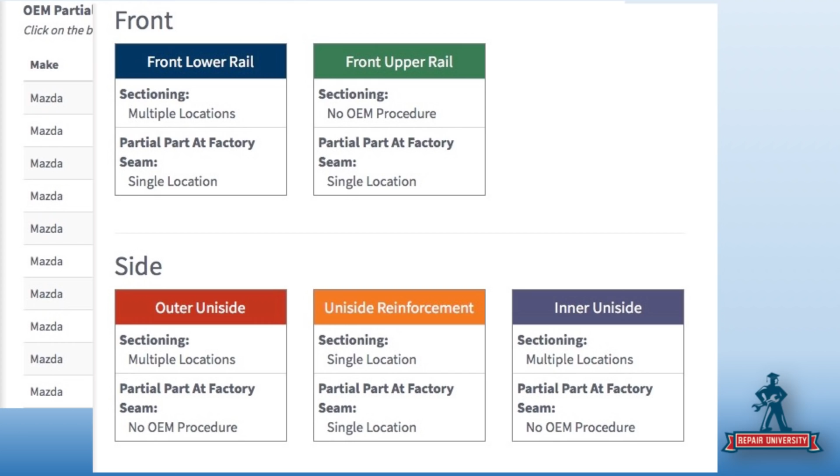Yep. And maybe if I'm an insurance estimator or a field appraiser or whatever, then I work with the shop to have them access the procedures to make sure I'm accurate. Or right away, if I'm an estimator in a shop, I know I've got something to do. So kudos the way you guys put it together. Thank you. It's all color coded. I love it a lot. Makes my life easier.

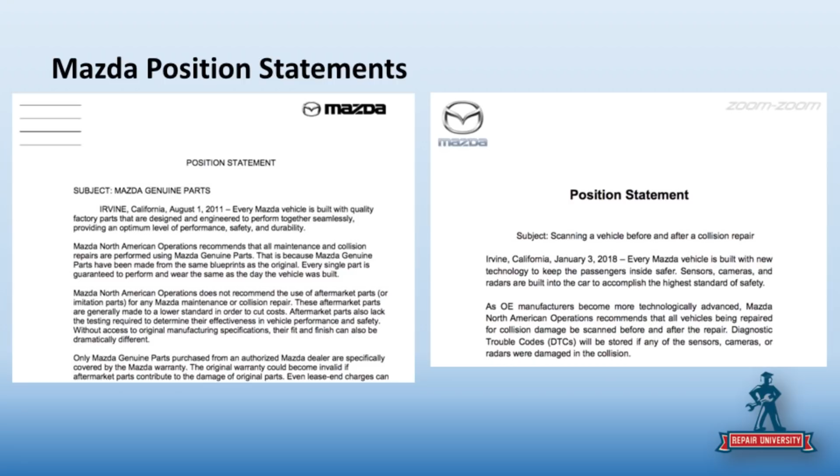And then position statements. So you've got the Mazda position statements on there. In fact, you're in the middle of an update because Mazda just gave us a new one. Yep. Finally. They don't have a whole lot. How many position statements does Mazda have, Larry? They have 2, and I'm very happy for it. I wish more companies wouldn't have position statements.

Unless a position statement really should be utilized for a big change across multiple vehicles that needs to be known, that we're not going to rewrite the whole repair manual. Or a new procedure came out, like you guys sent into Nissan. Nissan could have a position statement on this type of procedure because it just came out, it's an update, and we're just going to add this as an appendix to the manual already. Or like Honda came out with that page on their new welding and sectioning on outer panels only, depending on how many layers of material there are. So those are good position statements.

Putting a position statement on that you should torque wheels when it's already in the manual is redundancy. It's almost like a pacifier to shut everybody up. And yeah, there should be a wheel position statement because not a lot of companies put in there that you shouldn't be refurbishing them. So yes, I understand that. I understand genuine parts, but all manufacturers say that. That's why they're all putting them out.

And the pre-repair and post-repair scanning, that seems to be the new hot topic thing, but most of the German companies aren't putting anything out. I mean, I know Mercedes-Benz did, but like Audi, Porsche, they don't bother because it's already in the repair information. Yeah. That tells you what to do, and that's the issue, that we look at this as a crutch, like it's something that has to be there to help us out. It's almost like one of the Asian companies putting out a position statement: we recommend only high-test gas, which is what they tell you to put in the car anyway. So it becomes a little bit of redundancy.

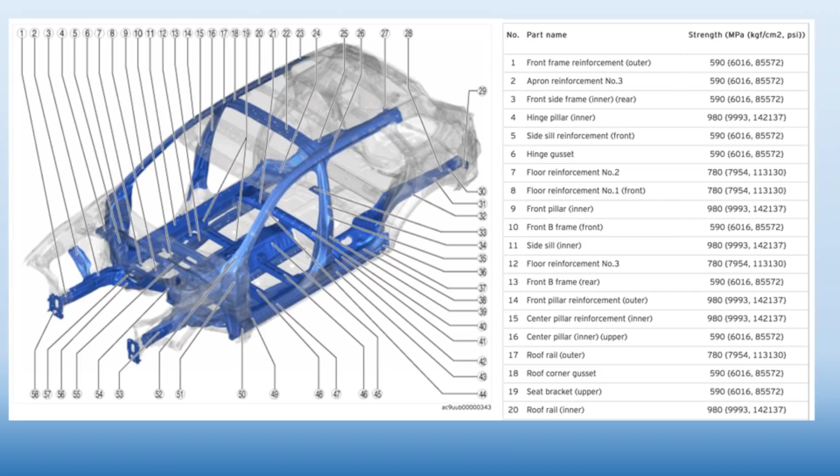Well, yeah, you're not, and that's why you've got to really look at this as a frame tech, a damage assessor, and really say, no, at the front, I'm just going to check. A lot of these cars nowadays, it's not a lot of pulling. It's a lot of setup, it's a lot of measuring, and usually it's just chop and change in many cases. Sometimes I see shops pulling cars that, what are you pulling it for? You're changing the whole rail. Pull to replace. And yeah, sometimes we see shops with 3 chains wrapped around the rails and going through them, and we're like, what the hell are you pulling?

But if I ever had a cheat, that was one of my go-to, because I didn't have a lot of information. Let's face it, State Farm wasn't going to give me OE access to repair procedures. But I knew that when cars hit a certain tensile strength, that if that was pushed in, there was no adding setup, measure, and pull time on the estimate. We were putting parts in. It helps develop that repair plan.

A really fast place for a lot of the insurance personnel to go find it if they don't have access to it: you go to boronextrication.com, and they have a lot of these pictures for the fire departments, the volunteers really, and a lot of the municipalities, city fire departments and stuff that are paid. And it shows them where they can't cut with conventional tools. That also works for us. Where they can't cut with conventional tools is where we have stuff that usually can't be replaced or repaired, and that could help you out also, because there's some articles in there that just transfer over, so that could be a help too, and that site's free. So I said that's one of my best cheats.

I like those diagrams. I like how it lists it out. It helps you when you're estimating, because you can match up the part that you think you're wanting to click on with whatever that part in the diagram is. A little bit. I used to use the Boron site all the time, but these sites give me a lot more detail, which it's worth the $20 to go in there and download all the makes and models that I think I'm going to run into.

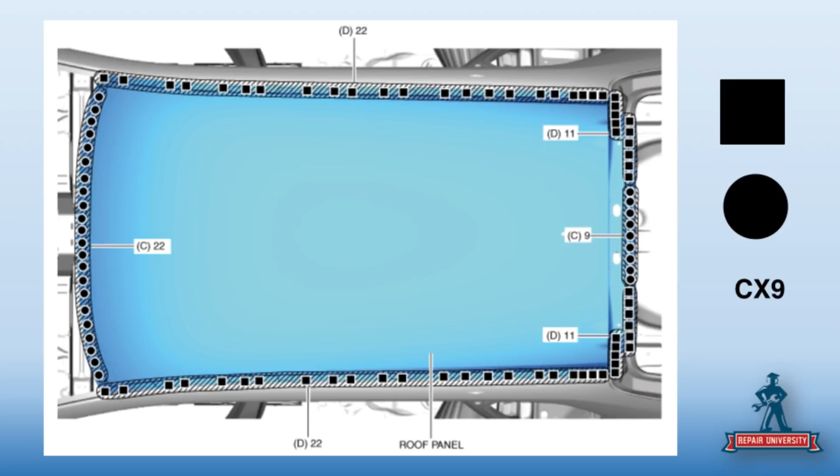So they want, I believe, 22 spot welds along the windshield pinch weld flange. They want 22 plug welds along the side of the roof panel. And then in the back, we've got a combination of plug welds and spot welds. So, like nine spot welds in the middle of the flange, and then 11 plug welds on either side on top of it. So again, very specific to how many plug welds, how many spot welds, the location of it, so you can't just put the entire roof on with spot welds or just plug welds. Right. You need to follow the procedure.

And the roof bows across, you would assume it's adhesive bonding or sound dampening material. It's not. It's just regular seam sealer, with some plug welds that won't pull out. And once again, they just say seam sealer. And where we found a little ambiguity in, I guess, the translation, there are some sound dampening pads that are put in there that don't sound exactly the same way when they translated it. What was that translation again? Dumpling, I believe. Dumping pans. Dumping pans.

And the square, the reason we put that up there, the square is universal for Mazda as their MIG plug welds, and the round circle is their resistance welds or squeeze type resistance spot welding. So that does help out. There is a legend inside their repair information, just like Toyota had last month. And this will really help you go through each one. But this is why you have to know the hieroglyphics of each company, because each company is different.

Yeah, you know, this is a prime example: this roof is going to come off and it's going to go back on with a procedure that looks a whole lot different than what it was made with at the manufacturer. Yep. And it's going to have seam sealer, not adhesive at all. But I have got to access those procedures. And if you don't have a resistance welder, you can't put this roof panel on. Don't touch the car. Yeah.

Plain and simple, you have to have a resistance welder. You can't just MIG substitute, plug weld everything. Yeah, so there is a specific requirement, and it does not say in here that you can substitute. Right. So substitute spot welds for whatever. And then, you know what, they're very ambiguous.

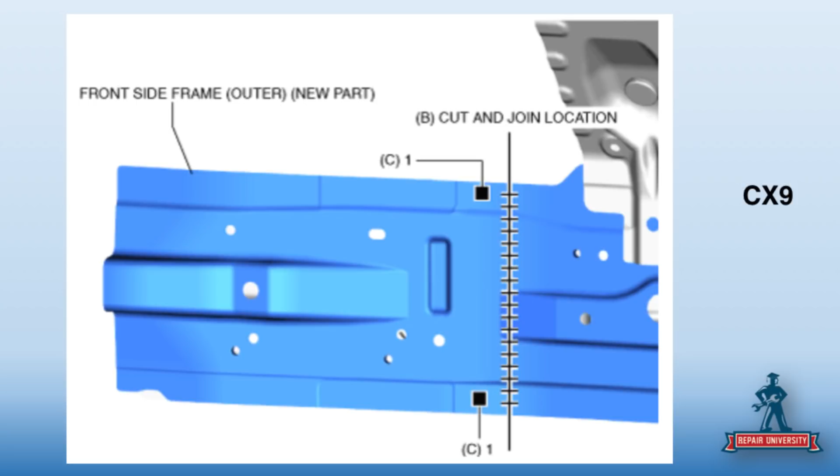So on the CX-9, we're using an open butt joint to replace that sectioning joint on the lower rail. And then as we jump over to the Mazda 6, very similar kind of cut location. Looks very alike. Yeah. However, for this one, we're going to be using the damaged part that we took off and building some inserts. So we're not just using a 50 millimeter backing plate that some vehicle manufacturers would recommend. We're not just using an open butt joint like on Toyota or on the CX-9.

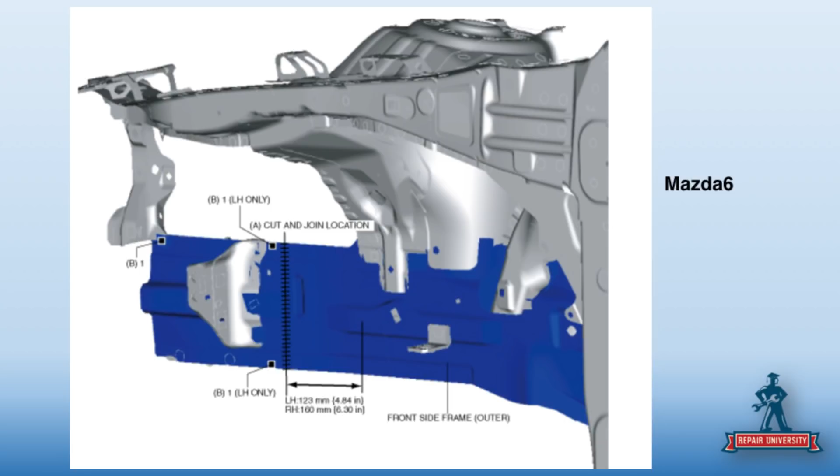Well, we're now cutting a section piece of unused material, cutting that in half, welding it back together, and it fits in there perfectly. These are strips that we're making, and they're not the same size strips. No, we got one that's around 3 inches, one that's around 4 inches. They're very specific. They're different on the sizes and length, different widths on what you're using here. And you really got a lot of pre-planning to do with this.

All of which I'll channel Dan. Give me some Danny. Yeah. Not included. There you go, Danny. Danny got his not included. Danny, if he's not going to make it on another show, I just need to have a Danny here that I hit a button and he goes, no. No, it is not included.

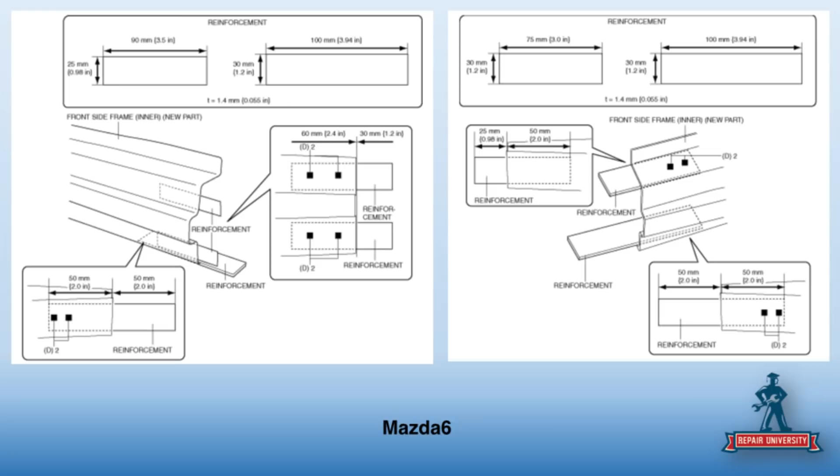And you know, you got a lot of planning here. You got a lot of measurements here. It's not just cut strips to make them fit. These are very specific measurements. No, I'll be honest with you. If I had a post-repair inspection or a quality repair assessment that there was an issue with, or I'm working with the engineer and we got a court case, and I cut this rail apart, and this is how crazy it gets sometimes, we'll measure out these strips. If they're not the right length and width, it's on you. Yeah. And it's going to become a problem.

This is why, you know, we talked about this yesterday. You have to read these procedures. And this is why we put this here, because Jason and I found a huge difference on two similar cars, some similar procedures, but different things on the same model line.

And that's what's so imperative with Mazda and why we're researching every car, because if I had a CX-9 in last week and it was just that open butt, and then now the Mazda 6 comes in this week, I go, oh, never mind, I know how Mazda wants the rails done. And these are both 2017s. Yeah, they're both 2017 models, so same year, but just different models within the same brand will have drastically different procedures. So we can't make any assumptions.

Nope. What you did last week doesn't apply to this week. Not even on the same make, because they could change it up there. So we definitely want to make sure that we have driven home the point to research procedures on the Mazda. Now, we could spend hours on the Mazda website pulling up different cars, pulling up procedures for everything from rockers to quarters to rails to roofs. And we're going to find a different procedure every time. This is what we discovered yesterday.

So we always recommend that you get on there and play with the website. So if you do sign up with the annual account or you sign up for a month, you're going to have to dedicate some time, maybe it's a night or a weekend, clicking around and finding the information you need so you can get used to navigating it.

But one of the things I wanted to spend more time on in this episode than we spent with Toyota, because I think Toyota had done a really good job over the last couple of years of educating the industry about a lot of their technology. Not so much with Mazda. So, Jason, we're going to go back to that i-ELOOP that we talked about in 2014 that had come out. So this isn't anything new. This is not a brand spanking technological development from Mazda on the 2018 models. This is about a 4-year-old piece of technology. Talk to me about i-ELOOP.

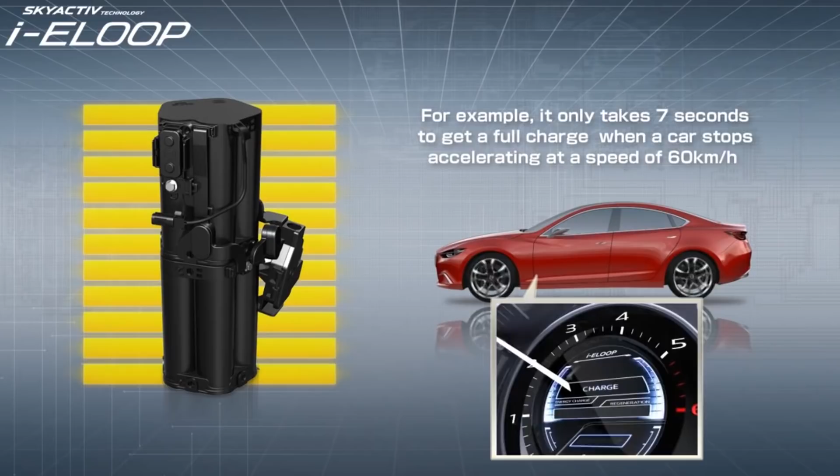Yes, the i-ELOOP uses the regenerative braking to store some of that energy and power the accessories, to put a little less stress on the other parts of the vehicle. So when you take your foot off the gas, as long as you don't have the clutch in if you've got a manual, through that regenerative braking it's storing energy in this i-ELOOP capacitor, which is in the front left part of the vehicle. It's fantastic, because that never gets hit. That's a great place to put it. Highly unlikely.

From a collision repair standpoint, what's important to know is that it's there, and that you need to be safe around it, because it's got that energy in there, and there's some very strict warnings about electrocution and making sure that you disable the capacitor properly, that you discharge the capacitor before disposing of it.

Boss, shove it right in the middle of it. Just right here. Just short it out.

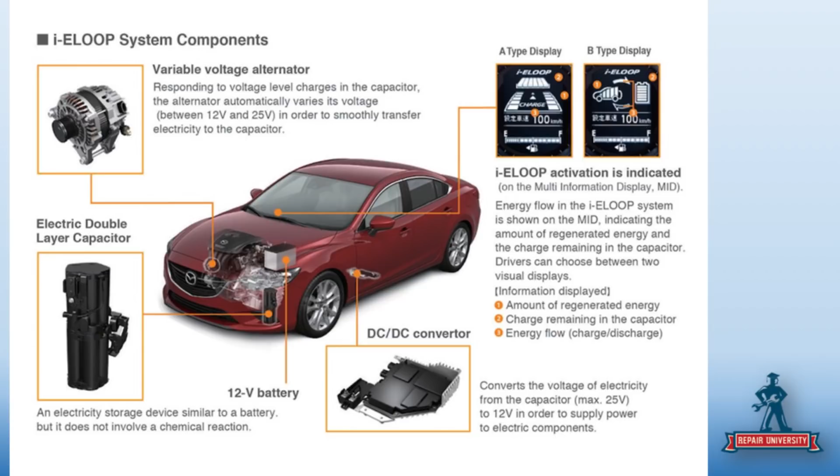Don't do that. And so there's the discharge procedure as well. There's the safety data sheets right there as well, because you've got the chemicals in there, the materials that are in there. So you've got very stringent information on what you need to do to make sure that you don't hurt yourself or your coworker. Don't inhale it, don't ingest it. Right?

Yeah. The safety data sheet was very entertaining because it was like, keep the victim. And I thought, victim? What? Yeah, you're not even the guy who's working on the car. You're already a victim, because if you're reading this, you're already near death. Keep the victim quiet and warm. I was like, oh my God! If you inhale it, keep the victim quiet. Get a priest there right away. Read last rites. The things you have to think about.

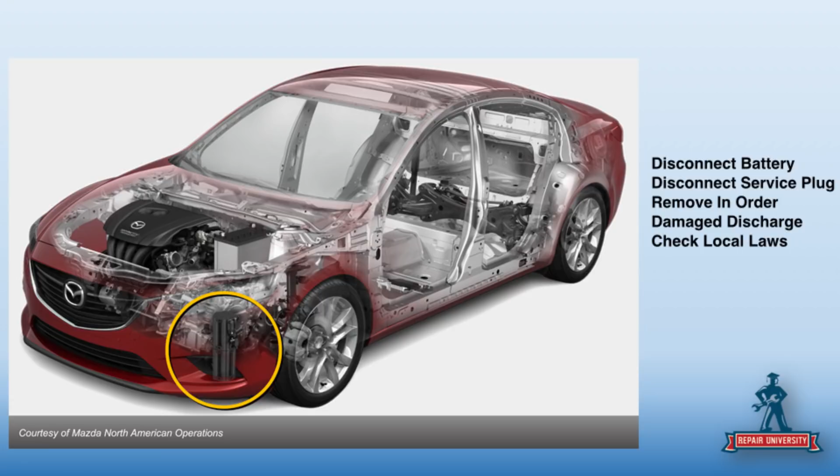But this is in a prominently impacted part of the car. Let's think about it. If I'm going to rear end somebody, what's usually the first thing someone tries to do? They try to cut it to the right real quick, and so that corner is probably the most hit corner ever in collision repair.

So a couple things about it. Mazda also says if the canister is dropped, it may not be usable. So you can't lay it on its side. Yeah, it cannot lay on its side. So if you are going to disconnect it and store it, you have to store it very specifically in certain situations. By the way, it's not included.

Before you can mess with this system, you must disconnect the battery. Oh boy. First thing you do is disable the battery, which again we follow some other information on now what the implications of disconnecting the battery are. We then need to disconnect. There's a service plug very similar to hybrid vehicles. So we've got a service plug that we're going to want to disengage to make sure that we have shut the system down.

And then they've got a very specific process for how to remove the specific pieces. So that process is there's a specific order, and if I don't disconnect things in that order, I may damage the capacitor. Absolutely. What, grabbing a Sawzall and using that to take it out is not the right way? Just ripping it out of there. That's right.

Oh, okay. And then there's a plug inside of the capacitor that you plug it into itself essentially, and there's an LED light in there. It takes about 2 hours to completely discharge it, and then if it's damaged and you're disposing of it, you need to look to your local authorities and how they want that disposed. Yep. So it's going to vary from location to location. I would imagine the procedure in California is probably quite different than the procedure in Arkansas.

Yeah. But New Jersey, you just throw it in the water. That's it, like they do everything else. We did learn that you can't throw it in the fire. Don't throw it in the fire. Oh, yeah. That was one of the warnings. It's got cool fireworks. I was just trying to envision what body shop has a bonfire going that just tosses parts. That Daffy Duck trick. I can only do this once.

Yeah, but here's the thing: the reason it's in writing is at some point someone did it, and they had to come back and go, no, don't do that. Absolutely. So this is a real concern where this part is. If I'm working on a bumper, the fender, the reinforcement, the odds are this part's probably in the way. I'm going to be removing it either to finish the repair, or because it's got damage to it and replacing it.

But I can't just throw it out, so it does have disposal requirements around it, individual to your shop or state or area or county. Sometimes the dealers should know, or they have a process. I know Toyota does with their hybrid electric batteries. Right. They have a process of coming to get them back. That's probably a place to call the dealer, and they'll have whatever's needed to be done. Just remember, there's a disposal and a handling fee for that, not included. So this is not part of hazardous waste, $3.50.

Why can't Scotty beam it up and just send it right to the dealer? Yeah. Oh, on the bottom of your estimate.

And one more thing that we forgot to mention on the i-ELOOP as well. Thank you, Jake Rodenroth, for your help there as well. Yeah, so we were channeling Jake today, and we got some more information from Jake that we've brought out.

Larry, you love my socks. I have no comments on it right now. You do.

We've got some more information from Jake that we're going to bring out. But this is 2014, and you don't hear a lot of shops talk about this. Yeah. You don't see a lot of this on estimates, so it makes us wonder what shops have been doing with this capacitor over the last 4 years that this has been on the road. And have we maybe put some in a landfill that shouldn't have been there?

But the reason I want to delve into safety so much and some of the electronics that Mazda has is we looked yesterday at the price of a Mazda, from the low end to the fully loaded bells and whistles. The cheapest one I found is $18,000, base sticker price online. And then I built the CX-9 with everything you possibly could buy, including all the accessories. The little net gate in the back, the dog holder, the grocery holder, all that stuff. And it came out to $48,000. So you're still talking an economical car, basically, to just below where luxury cars start.

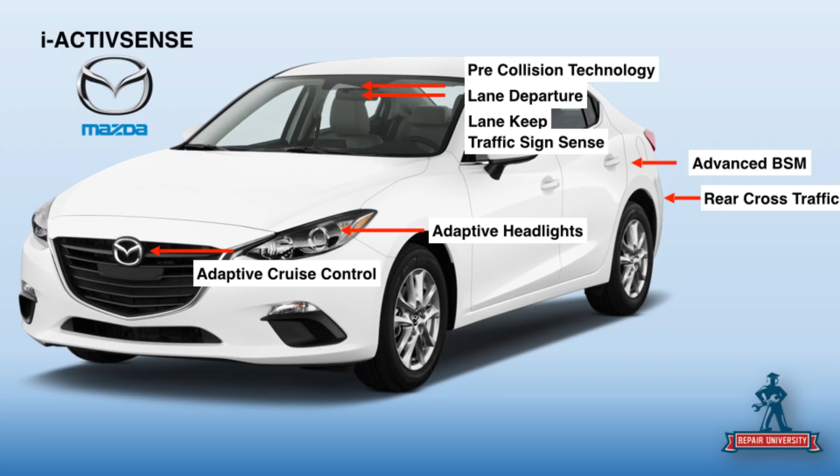And I believe to get the plus part of the Top Safety Pick Plus, you need to have automatic braking, which is available on the Mazda. Any vehicle that's got the Mazda i-Activsense equipment has the automatic braking on it. So for roughly a $20,000 car, I'm going to get $100,000 in technology. Some of the things that we're going to have on this $20,000 Mazda 3: adaptive cruise control, adaptive headlights, pre-collision technology, lane departure, lane keep, traffic sign sense. What was that, Jason? Yeah, traffic sign sense.

It's actually using the camera that's in the windshield area. It's looking at the speed limit sign. So if you get your cruise set at 55 and you're coming into town, who drives 55, but my dad does. Sorry, Dad. So we're coming into town, you're going 55 miles an hour into a 35-mile-an-hour zone. It's going to sense that sign that says speed limit 35 and give you a warning that you might want to slow down a little bit. My $20,000 Mazda is reading the traffic signs.

Yep. It's also looking at one way and do not enter signs, so you can't turn into a one way. So the car won't let you turn even when you want to. A lot of that stuff works off of not only the signs, it also works off of the navigation, telematics, and information like that, and it's all talking to each other.

Now you've got to remember, about 8 years ago, none of this stuff was really available in mass-produced cars. It was on your Mercedes-Benz, your Audi A8, your BMW 7 Series, maybe some 5 Series fully loaded. This was the German stuff, and it's trickled into an $18,000 car now. I know there's some other cars out there that are like $12,000 you can get this stuff in. Yeah. And it's to keep us safer. Cars still get into accidents, but it's to limit injuries, limit accidents, keep cars safer, keep traffic moving.

So wait, hang on. Let me wrap my mind around this. I'm changing a bumper cover and a headlight. And I got to weld some pins on the fender to pull out some dents, and I'm going to disconnect the battery. I didn't touch steering, I didn't even take the wheel off the car. I turned the wheel all the way to the left, took out the clips, started the car again, turned it all the way to the right, took out the rest of the clips, and took out the splash shield. I didn't take the wheel off. And you're telling me just because I disconnected the battery, I gotta do the steering angle sensor?

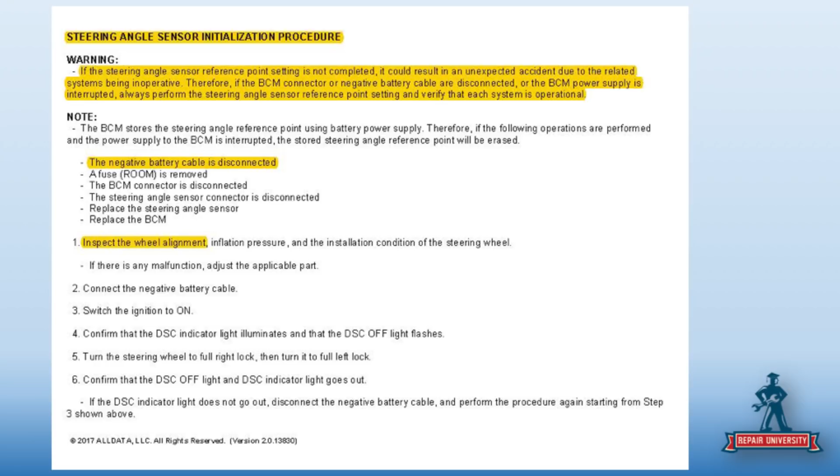Absolutely. And are we doing that just because we want to mess with alignment, or does that steering angle sensor actually drive a lot more of the components on the car? Again, it's going to tie back to all these advanced safety systems, making sure that the sensor understands where it is in correlation with where the vehicle's going, because they're all interrelated.

Yeah, and Mazda has a great position on this. Jake did a great job of highlighting this. If you don't do this on a car, let's think about how many Mazdas you've had in your shop in the last 3 years, because this isn't new, where you've had to disconnect the battery. Did you do this? And if you didn't do this, Mazda says an unexpected accident may occur. Not good.

Wait a second. I got a little bit of a problem with that. Unexpected accident. Versus the planned accident? That's right. I expected this accident. My wheels wobbling all over the place. I expected to get into a... No, I mean, that's why I call them accidents. They're not called on purposes.

Well, based on the systems that are involved, you may think that your crash avoidance is going to work, or you may have what we called the catastrophic failure in the suspension and steering show last month. The car may not react the way you expect it to, or the way you anticipated, because something's off on it. The car may not avoid a car in front of it because the steering angle sensor's off, and it thinks it's over here, and really it's over here, and it's going to run into the back of another car, and that's the problem that we have.

Yeah. So I see this a lot. As I go back and look at older estimates that have been uploaded and sit down with some of the shops that we work with, when you look at what they've done to cars, and then what wasn't done to the car before it left the shop, it's kind of a scary situation, because this information's always been available to us. This isn't anything new. Had I read the manual, sat down with the insurer, if that's the bill payer, and went, hey, if I don't do this, an unexpected accident may occur.

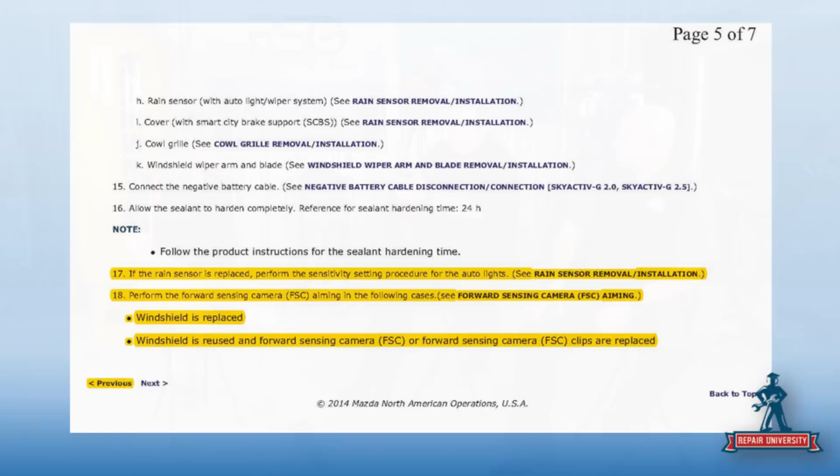Then I got to go through all of this rain sensor calibration so that I don't have an unexpected accident. For what though? On what system? All of them. No. Remember we just talked about it. The steering angle sensor. Wait. So I'm really confused now, Jason. If I take a glass out that has nothing whatsoever to do with steering and suspension at all, I gotta recalibrate the steering angle sensor because I cut a glass out of a car. Right. Yeah.

I hope we're stressing the point to everybody out there how crazy this has become that you have to read and understand. And you know what? It has nothing to do with the physical components. It's electronics. Yep. This is electrical systems. Just glass. I mean, if we're real honest with ourselves and we think about over the last 2 or 3 years how many Mazdas have been in our facility, how many times glass has come in and out of those cars, specifically, let's think hail belt.

So all of us that have had a lot of hail claims where I'm doing a hood, roof, trunk, right? How many of us were disconnecting the batteries before the windshield was going out and then making sure the battery was also still disconnected when the windshield was going in? Right? So the glass guy comes, maybe he takes the glass out and we drive it into paint and do whatever we want to do. Are we disconnecting it again before it goes? And as soon as that battery's out, now I got a whole set of calibrations that I have to go through.

You know, maybe an analogy that works for everybody about disconnecting the battery and doing all these electronic resets. You ever download a program that you needed for your computer, maybe to open a picture or a video, and then it says, do you want to restart your computer now? Otherwise, that new app doesn't work. Or you update your iPhone or your Android phone, you got to shut it off, restart, and punch in your number, the fingerprint won't even work. That's the same type of thing here. Once you disconnect the battery, some of this stuff has to be recalibrated.

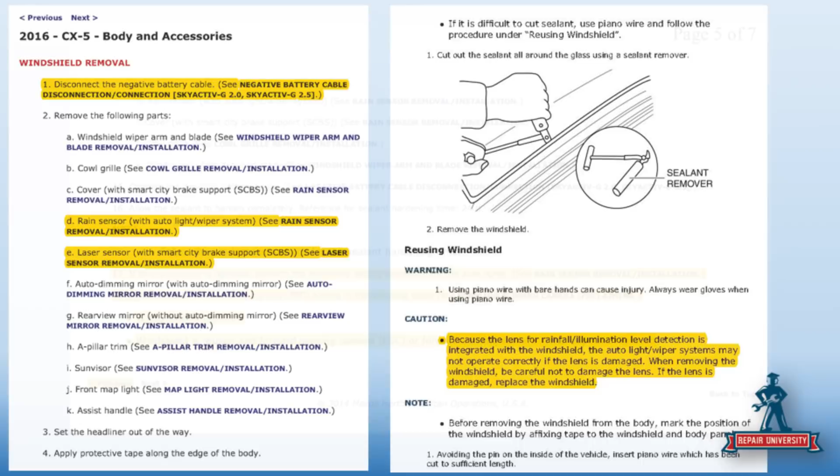It's all electronic stuff. It's got to be restarted in a way. So one other thing about windshield replacement, not just for Mazda, but there's a lot of OEs that have that: the entire windshield in itself becomes a sensing screen. Whether it's for Mazda, they say for rainfall or illumination. But it's sensing. We're using it as a lens, so to speak. And Mazda calls it a lens. So I've got a camera back here, right? And the windshield becomes the lens for that camera.

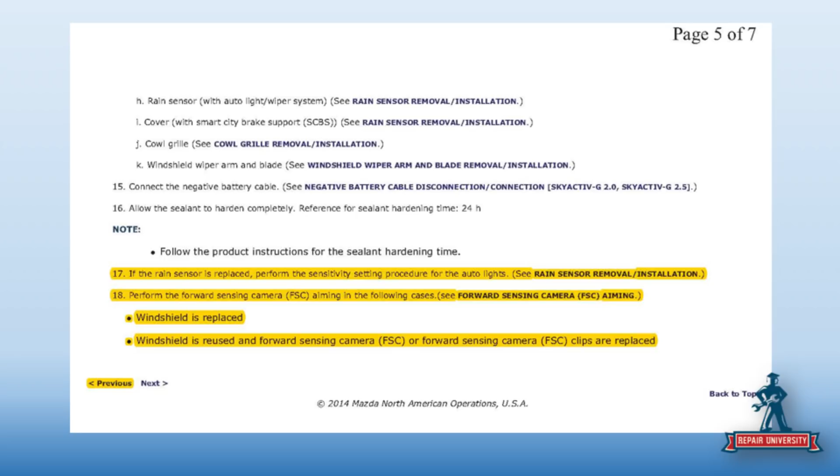So when you are removing the windshield, Mazda has some very specific safety precautions for how you cut and remove that windshield and the skill that needs to be taken. And then the inspection process to decide whether that is a reusable piece of glass or now you're going to have to buy a piece of glass because of how you took it out.

And when you're putting that replacement glass in, make sure you're getting the right glass because, again, because of the cameras, because of the rain sense, because of the headlights, because of the i-ACTIVSENSE, we need to make sure we're putting the proper glass in there for that particular vehicle, so those systems function properly. Yeah. Otherwise, they won't, and you're going to wind up with a nightmare of trying to cut out a glass that didn't work to be able to redo everything again.

Yeah. So if we didn't scare you enough about 4 months ago, I think it was November, we did the glass show, and Mark was here, and we went through it and basically said, you better get a handle on your glass guy, or whoever you're subletting glass to if you're not doing it on your own. Well, this, again, is one of the most popular cars on the road, something that your average collision shop's going to see probably 3 or 4 a month of in their facility. You better have a handle on your glass guy.

This isn't some $150,000 to $250,000 high-end ridiculous luxury car. This is an $18,000 car that you have to follow the same thing you do for the $150,000, $200,000 car. I got to treat the $18,000 car like the $100,000. Exactly. And since we removed the glass, now we got to calibrate the IR sensor as well.

Yeah. So the one thing about once you take the battery out, it's going to trigger a ton of systems that have to be recalibrated. So not just the steering angle sensor. We talk about that one a lot because we feel like it's one of the most misdiagnosed, not performed. The Armada we had in here first part of last year, that was the first thing they had missed. And of course the customer had been driving with this signal on her dash for a year and a half going, well, the dealership tells me they don't know how to fix it. I'm like, really? Okay. But we got it taken care of for them. So once that comes off, I got a lot of stuff to do.

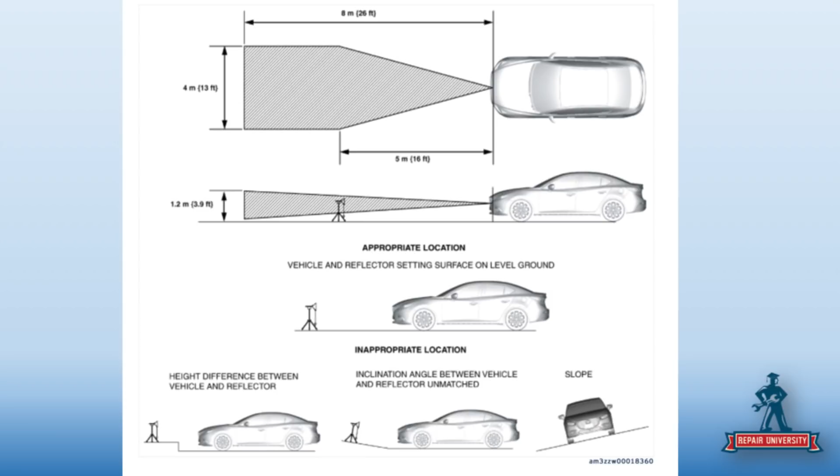So you either got to move the car a couple of times or you got to leave it in that space and have a really big space. And you need enough room on the side of the vehicle as well, so you need 4 meters of clearance on the side of the vehicle. You got to have the proper lighting, I'm sure. You got to have all the different factors that go into it.

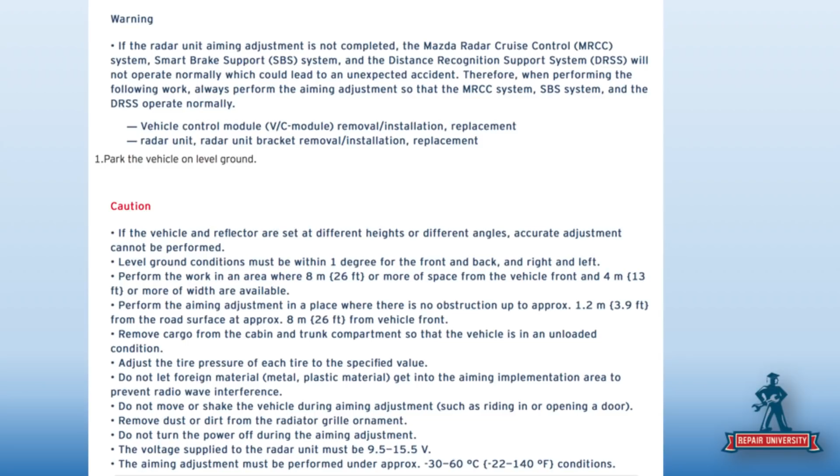Yeah, one of the other things that I liked about this was it goes through all of the different things that I need to do to the vehicle, such as verify tire pressure, make sure each tire is inflated to the proper weight. Well, the first thing it says is if the vehicle and reflector are set at different heights, different angles, accurate adjustment cannot be performed. So you have to be able to move some of these things around and have adjustments on them. So it just can't be at one.

This is not the 1970s where, at the end of the day, when it got dark out, we put the car outside, or we shut the lights off in the shop and we lowered the garage door and we tried to aim the headlights with a little screwdriver. This is no longer that. I was so good at that, though.

Well, here's the nice thing of this. For Mazda, the headlamps align themselves. So that is one nice thing. So you don't have to worry about pulling the garage door down. Yes, that works as well. But as Jake mentions all the time as well, maintain the proper battery voltage before you do this procedure.

You got to empty the vehicle, take the stuff out of the trunk, except for the spare tire. The vehicle must be unloaded, tire pressure must be accurate. You've got to make sure. There are so many things that I've got to do that don't even involve plugging the scan tool in. And you need a trickle charger or battery tender. You can't use a jumper box. You have to have a constant feed to it.

Yeah. Now, you did bring something to our attention. I did. That Mazda was not completely against aftermarket parts. That's correct, because they allow for it. So Mazda has a tripod with a level on it that you use for some of the calibration procedures. In the service information, they will allow you to use an aftermarket tripod as long as it has a level on it. So there you go. There's some allowance for some aftermarket parts from Mazda.

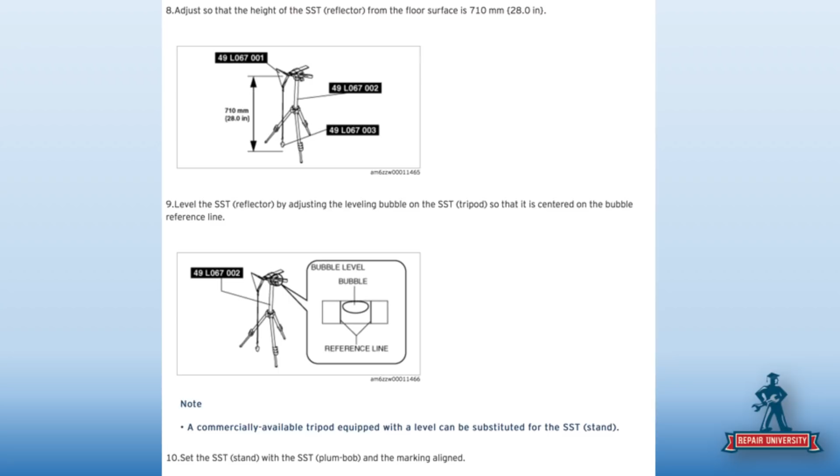So I can take 3 sticks, tape them together, and then put a Home Depot level on top of it. You have to have a level. That's my frame machine. That's right. Wasn't that what was on that Ford truck that got posted online? Yes, it was, that Ford truck. Oh my God. Okay. I got a level on it.

The Home Depot special. But yeah, so now I got to have 26 feet. I got to have the vehicle unloaded. I've got to have the tire pressure perfect. I've got to be on this level surface, no obstructions, 26 feet between the vehicle and the target. I've got to have the target and a radar cup on a tripod. It's got to be balanced and level as well. Is that included? No. None of that is.

That seems like an hour or so worth of work right there just to get the vehicle ready. Probably, like a true insurance person. Yeah, that's like an hour worth of work. Well, you can round it up, right? You can round it up to 5 if you want to. But that's a lot of work just to get the vehicle ready. And I haven't plugged the scan tool in yet, and I haven't started yet. And you haven't positioned the level yet. Now I got to get the radar cup in place. But at least you can use it for the front and for the rear, so you can dual purpose it as well.

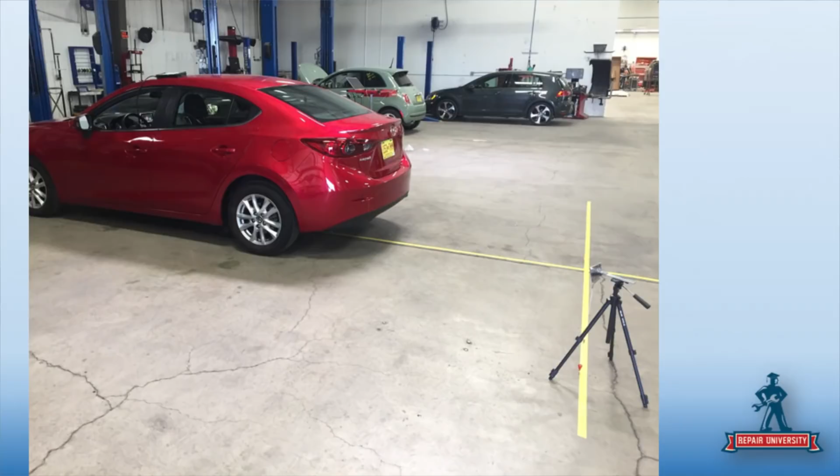Yeah, so this is a great picture from Jake and the asTech team. They have mobile diagnostic units, so if you're a shop and they happen to have a mobile unit in your city, if you don't want to do all this or you don't want to send it to a dealer, asTech has some mobile solutions for you. But Jake and asTech provided this for us to look at, and that's the tripod and the target, and it's all measured out on a level surface, and that's a lot of space in the shop.

And then plug the scan tool in and go through the procedure, which says, again, first thing, make sure there aren't any DTCs before you do the calibration.

And that's a great point, Jason, because I'm going to fully admit, there's no way I'd get all this done. And there's no way I'd know if it was level, and I would be throwing things. Toast. I can make ice though. You can make ice, but you can't make toast.

But even if a shop gets all this done, it's more than just the tool. There has to be a trained person with the knowledge to know how to read it. It's still a little difficult because this is not stuff you're used to doing. This is completely off what you used to do. Even some dealers haven't been through training on this. The detailer's not going to do this pre-delivery. Right.

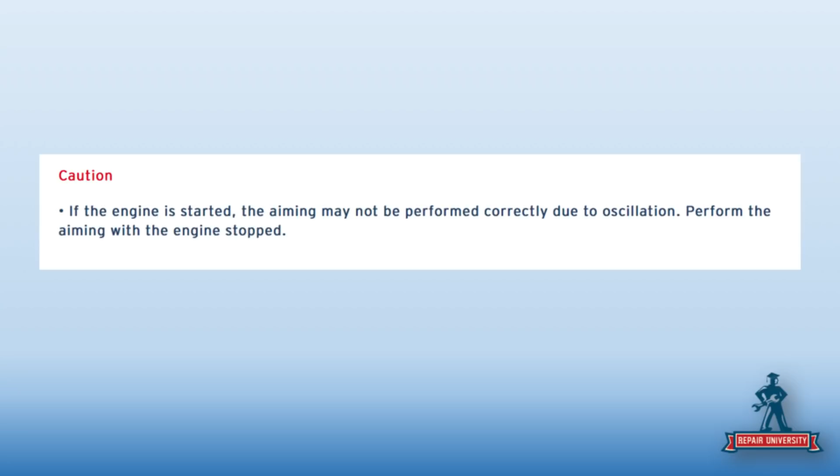But wait, there's more. We just thought this was an interesting caution as well. You need the ignition on, but the vehicle can't be running when you're doing the calibration of the adaptive cruise control, because they don't want the engine shake to cause some disruption of the adaptive cruise control. So a very specific warning not to do that.

Now, if you are a very ambitious shop, kind of like Toyota, Mazda gives you the option of printing and making your own targets. You don't have to buy, like Audi, where some targets are around 8 to 16 thousand, depending on what you need. They can be very expensive; by the time you're done buying everything, probably $40,000 into it. But Mazda gives us the option of printing and making our own.

On the Mazda website for the camera aiming procedure, they have a template where you can print off a white square and a black square. Now you need to make sure they're sized properly. That's one challenge we've run across. If you just automatically print it, it may be the wrong size. We did this on a Toyota vehicle, and it printed too big. We ended up using 77% size to get the proper dimensions.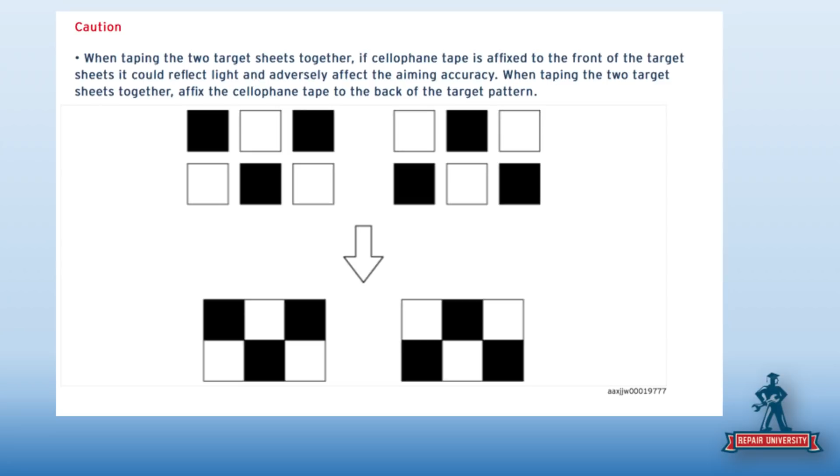You print off three white 5x5 pieces and three black 5x5 pieces, and then you tape them together. Make sure you put the tape on the back so that it can adhere properly, the pressure-sensitive adhesive. If you put it on the front, it's not going to stick to anything else. It'll stick to your hand. They also don't want the tape showing when you're taping the targets together because of the reflectivity. That's the biggest thing.

I thought they gave us a little too much credit with the cellophane tape, and I'm like, I don't know any shop that's got packing tape. We're going straight to the masking tape and making this work.

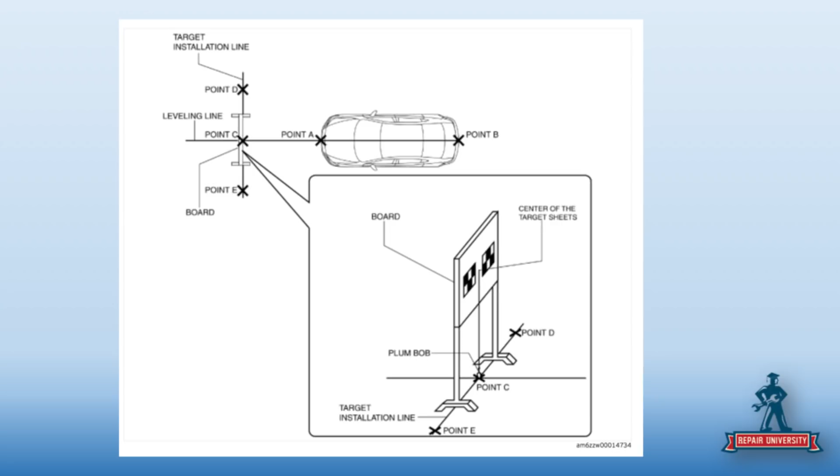So we're going to take our 3x3 and our 3x3, and then put it on a non-reflective wooden board. Then I'm going to get in construction mode. Then we're going to set the proper height, put it out in front of the vehicle at the proper distance, hook our scan tool up, make sure there aren't any DTCs, and then go through the calibration procedure.

Now, when you change the bumper, the time to build this construction stuff and the scaffolding, that's all included, right? No. Oh. The first time somebody told me we're not paying to take the car to the dealer, I'd be like, okay, no problem, hold my drink. 12 hours of construction later, I've got your car calibrated.

Now this is for the static test, obviously, but they do also have a dynamic test.

Yeah, so if you're not in New York City and you can take the vehicle on a road and get up to the proper speed, you can also do a dynamic calibration for it. And that's one of the things that shops, when we talked about this yesterday, that we kind of want to drive home, doing a dynamic test or a static test, or what we used to call the road test.

Now let's face it, before we deliver a car, we should be doing a road test. Most shops don't because they just don't have the time or the liability or whatever involved. But we drive the car around the block, right? We just make sure the wheels stay tight. Not enough. We make sure that nothing fell off of the car. But for these types of dynamic testing, I'm going to be taking the vehicle on maybe a 20 or a 30-minute drive around town.

Yeah, so the lane keep assist and the lane departure warning, or lane keep, is not active until you're over 37 or 38 miles per hour on the Mazda vehicle that we're looking at. So you need to get the vehicle up to that speed so that that camera, as you're going through the calibration procedure, can see the lines on the road and understand where it's going. And it's not going to be a report out on the scan tool from what we found. There are going to be different bulbs illuminated on the dash that will be blinking, and when they stop blinking, then the calibration procedure is done.